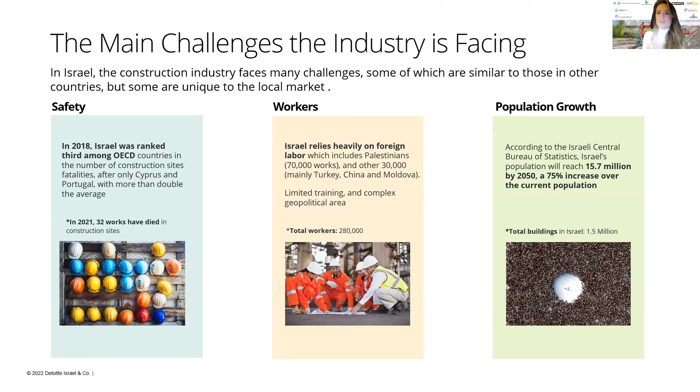But I think one of the most interesting challenges the industry faces in the next couple of years isn't from the industry itself, like workers or safety, but rather a cultural phenomenon in Israel that has a huge effect on the industry: population growth. Israel actually has by far the highest population growth of all developed countries. It grew three times as fast as the average OECD country, and it's way above countries like India or Bangladesh, which is surprising. The fertility rate in Israel is 3.1 per woman. We have children, a lot of them, and it's not only because of different kinds of societies — it's a population-wide phenomenon.

This means we need to build a large number of buildings in Israel, almost doubling what we have today in the next 15 years. So we have to build fast to meet the demand. This would be fine if we were a country like Canada with endless land to build on. But in Israel we have a lack of land — we have 21,000 square kilometers as a country, but more than 60% of it is desert. So we need to build fast, we don't have where to build, and we don't have enough good, trained workers to do so.

So overall, the industry faces huge challenges that will push it towards innovation — they cannot succeed without it. But this is only local, right? These are local challenges in Israel. Some of them are global, but these specifically are local.

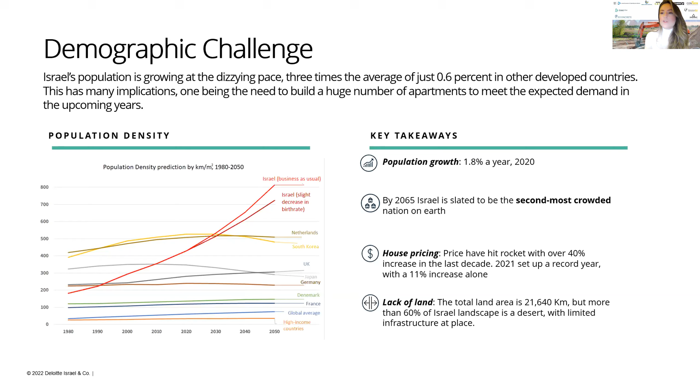What happens when we look at the most global, immediate challenge the whole world is facing — climate change? Israel was established 70 years ago, but we were dealing with survival most of the time, and we still have a lot of challenges. We're an island inside the Middle East, so climate change was not the government's immediate concern. We pushed it aside and didn't do much to address this big challenge. But it's not like we're not feeling the effects of global warming — we're a hot spot here in the Middle East, experiencing almost double the rise in temperature compared to global warming in general.

Israel is feeling it particularly strongly. But over the past 3 years, Israel has taken a few steps toward entering the game to combat this global threat. I'll give you a few examples. The first is Glasgow 2021 — Israel participated and set up very ambitious goals to reduce emissions. The Green Building Council and its standards in Israel were established 16 years ago on a voluntary basis, particularly new compared to other standards in the world like LEED or BREEAM. The Israeli standard was the latest and started completely voluntary, but next month, March 2022, it's going to become mandatory for all new buildings in Israel.

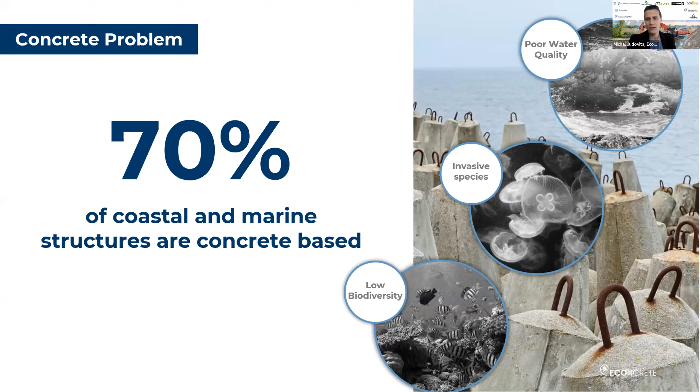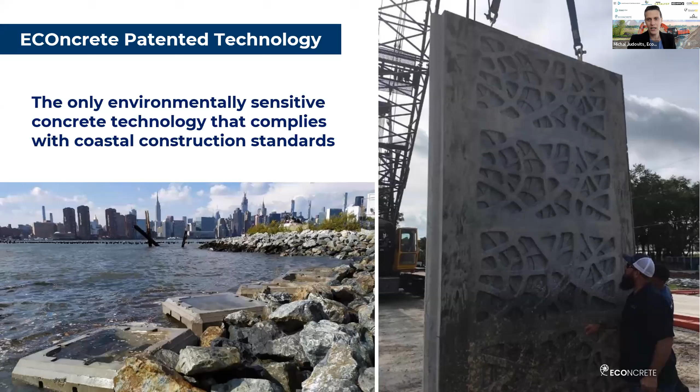Concrete is a rather harsh material in the marine environment, and typically those structures are dominated by invasive species and really burden the ecosystem. Today, we are the only ecological concrete technology which complies with coastal construction standards, allowing us to preserve beautiful and highly protective natural coastline ecosystems like oyster reefs, corals, and mangroves, while not making any compromise on structural functionality, stability, and strength.

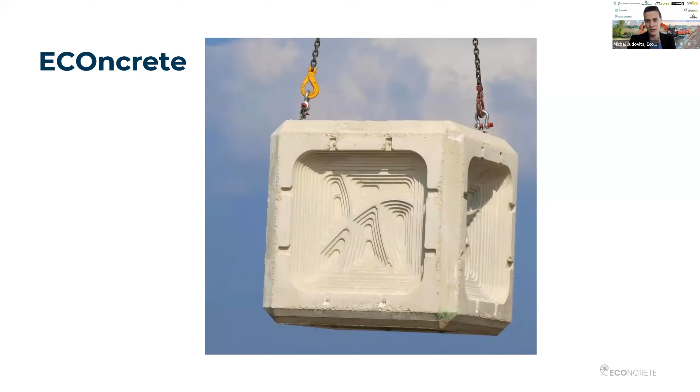In order to preserve the natural lines of defense for the coastline, ECOncrete came up with a biomimic win-win solution to bring concrete to life. The technology is based on three elements that work together in synergy. First, the material composition - we have developed an admix component that represents about 10% of the cementitious materials of the concrete that neutralizes the negative effects of concrete on marine life.

Then we were looking at the surface complexity. What you're seeing on the right is a texture - when you're thinking concrete, you're thinking about something very smooth, very straight. We actually spent a lot of time in the lab trying to mimic that look and feel of natural rock.

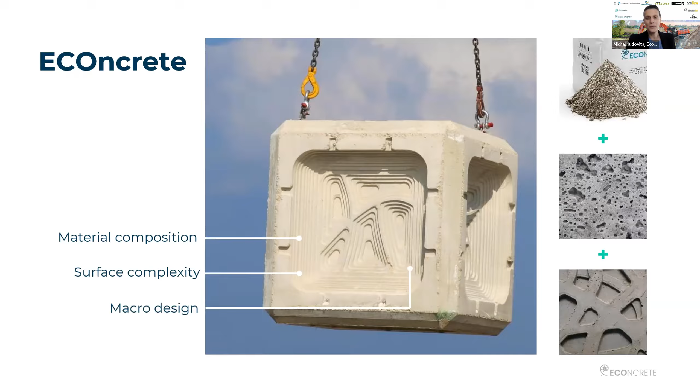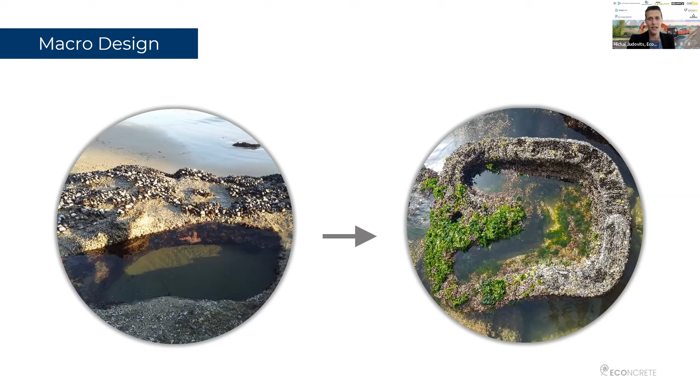And then we're looking at the macro design. In order to come up with the designs, we were looking at nature - the shell of an oyster and the polyps of a coral for our surface texture design, and habitat features like tide pools and mangroves for our three-dimensional designs. All of those three components work together without compromising the strength and operational capacity of the concrete.

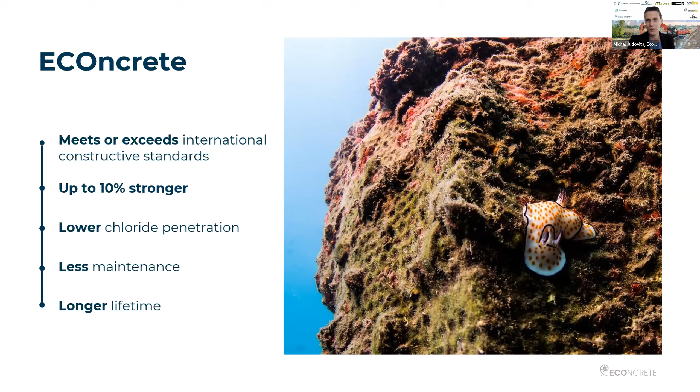The technology provides ecological solutions and advantages, for example increased biodiversity and reduction of dominance of invasive species, and increased aesthetics. But, and not less important, we also realize that the technology is helping to protect the infrastructure, to make it better, longer lasting and stronger in a process called bioprotection, where the skeletons of organisms that grow on the concrete actually make it stronger over time and reduce the sensitivity to erosion and even to chloride penetration, which could translate in the long run to reduction in maintenance costs.

Let's see how it looks. This is a piece of concrete that has been put in the Mediterranean, and this is how it looks after 12 months. You don't see the concrete anymore. What you do see is oyster and tube worms and coralline algae that are thriving on the concrete.

If we're going to talk some numbers, 1 kilometer of our ecological seawall absorbs 2 tons of CO2 per year, which is equivalent to 100 adult trees. But the interesting thing is, this is happening - just to give a very short explanation without getting too much into the biology side.

Because we're working with nature, we are seeing a process of calcifying organisms that creates an active carbon sink. This happens throughout the lifespan of the project. So every year it's like planting a forest, and it's not something that happens only once. In 60 or 120 years, the system will keep on turning CO2 into calcium carbonate skeletons in a very healthy process.

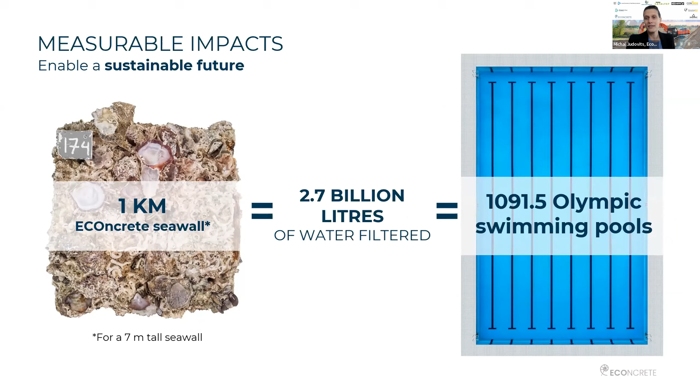What it also does is filter the water. So, same thing, 1 kilometer of a seawall is equivalent to almost 1,100 Olympic swimming pools in terms of the capacity of water volume filtered. And this is happening every year throughout the lifespan of the project.

Let's see a bit of how it looks. We're adjusting - this is a technology. It's important for me to say we are not a construction company. We're a technology that can work with different products, different shapes, and different applications.

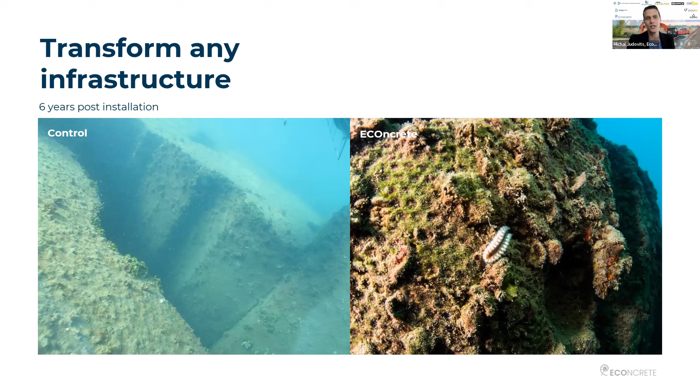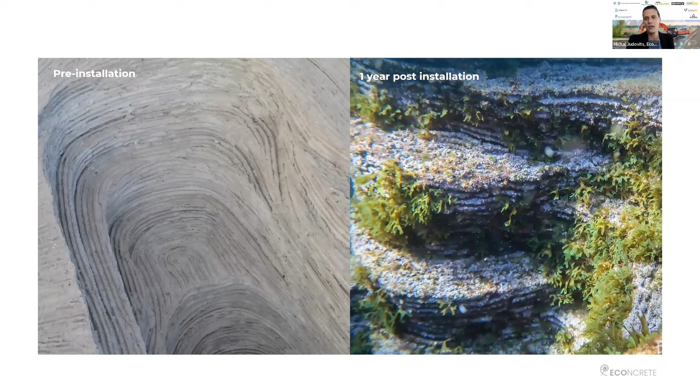What we're seeing here are tide pools - pre-installation and 1 year after installation. You do not see the concrete anymore. We're working in different ways for different solutions.

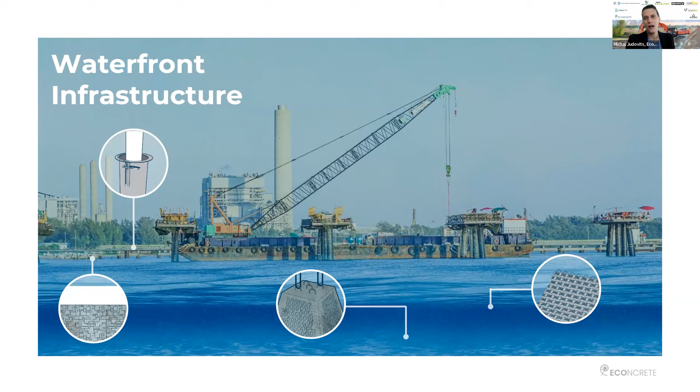If I really try to simplify that, we have shoreline protection, we have waterfront infrastructure - so everything that is touching the water: ports, marinas, bridges, tunnels, piles - and then we have the offshore application, as I was saying, marine mattresses, mooring units, and also scour protections.

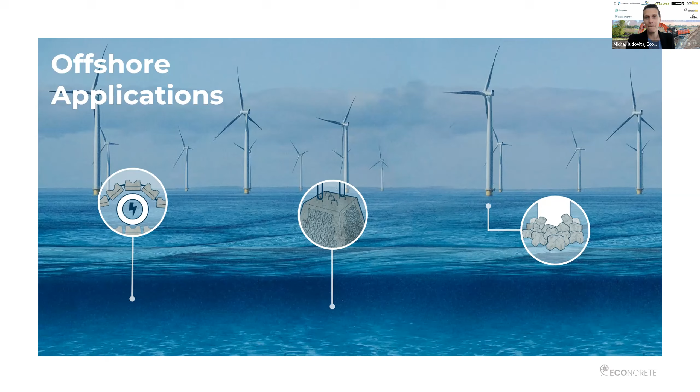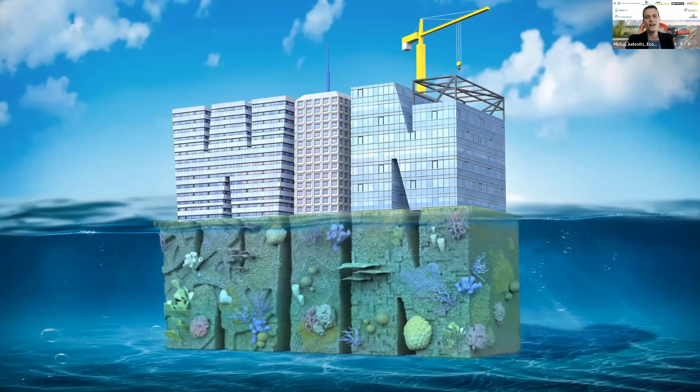Finally, I want to talk about impact. So the goal here is to change the industry and to have nature inclusive infrastructure across the globe, bringing higher biodiversity, better water quality, and active carbon sink, but also to help projects with permitting, with mitigation, and to allow the project to be robust, longer lasting, and even low maintenance. This is what we call our win-win solution.

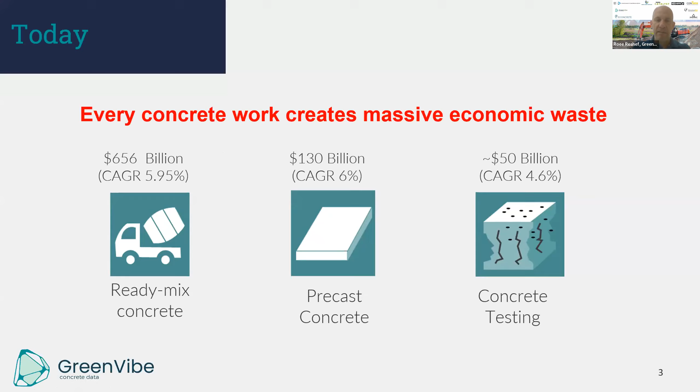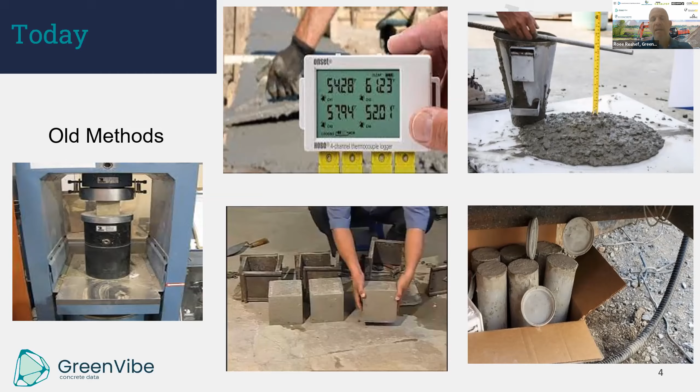The core reason for that is that the industry is still using very old methods that are not up to date. They're not delivering the right data that is required, and there is a big gap.

Eventually, as of today, concrete is kind of an art. In Michal's presentation we said it to the extreme, but concrete is an art in the negative way, I would say, and GreenVibe is actually making it science in order to do the industry optimization. This is something important to keep in mind.

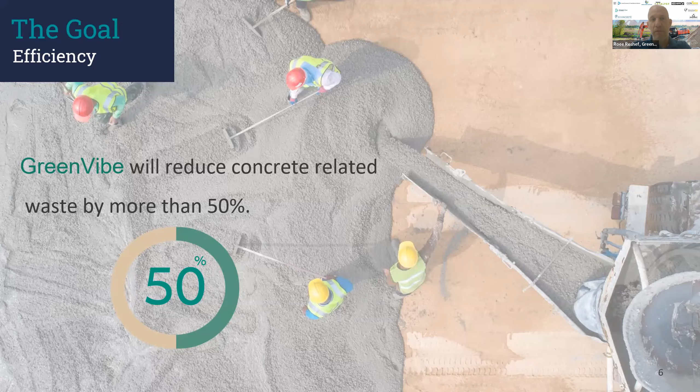There is a massive waste, and we're aiming to reduce more than 50% of the related waste. That doesn't mean the cost will be reduced by 50%, but the overall waste is going to be reduced. If we're talking about time, we're going to cut time waste on site and in other segments by 95%. All kinds of failures faced on site are going to be cut by 50%, and the cost related to them by 75%, simply because we're going to capture it much before it's usually captured.

Cement redundancy is a real problem in the industry. Today, the over-design, the safety margin of cement, is between 14 to 50%, depending on the specific concrete, and this can be cut by at least 50%. We're aware it's not going to be zero safety margin, but it can go down to 7 up to 20%. There is no need to keep such high levels of safety margins.

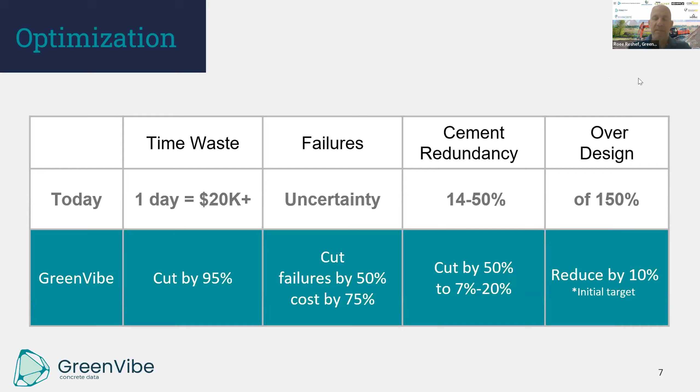Looking at the industry overall, it's well-known that the industry is over-designed by definition, and we're aiming in the long term to reduce the over-design. Just for the sake of discussion, over-design means that if a building is based on concrete and it's 50 floors, usually the infrastructure can hold up to 75 or 80 floors. It simply doesn't make any sense. The main cause is that from the planner to the concrete suppliers to the GCs, the general contractors, they have no data, so each one of them is adding more and more safety margins.

So eventually what we're delivering in a very accurate way is the strength of the concrete in real time, temperature, humidity, and a set of other parameters that are helping all the different segments and angles of the industry to improve themselves on site and from the supplier side, meaning the concrete suppliers.

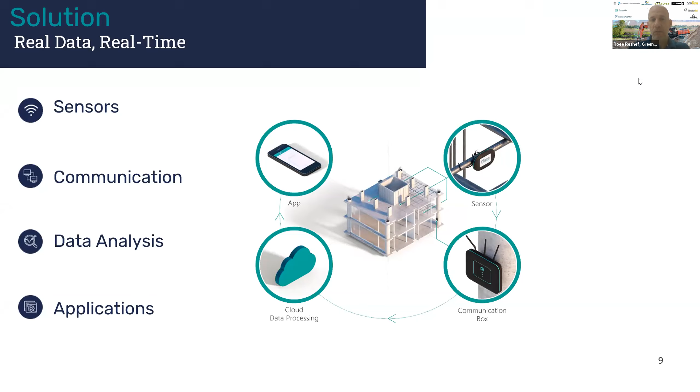This is a scheme of how the system looks like. We have the sensors, we have the hub that communicates to the cloud, and then we're calculating all the algorithms and delivering in real time very accurate data about what's happening inside the concrete.

I don't want to dive into the technology too much, and I can relate it to some of what Maya said at the beginning, because at least one of the technologies is coming from some kind of defense application being used in Israel. But eventually, we're doing a synergy of very deep technologies, and the outcome is a very accurate, deep analysis of what's happening in the concrete that you can really trust and operate according to the data.

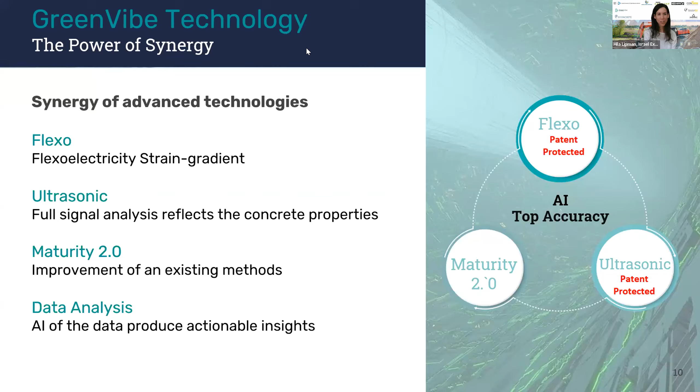Michal, can you tell us what exactly kind of projects you are looking for in Germany, and maybe if you have some activities already in the German market, we'll be happy to hear about that.

Thank you for that. As I said, 5 minutes is a very short time to introduce what we're doing. We have 3 types of applications: one is shoreline protection, the second is waterfront infrastructure, and the third is the offshore industry, meaning there are different opportunities in each of them for projects. If there is any project of construction, our vision is for every concrete in the water to be ecological. So any concrete for water construction, marine construction, is something we are going to be interested in.

On the other side, there are the partnerships. We're doing different collaborations and OEMs with companies that already have - I mentioned we are not a construction company, we are a technology provider, and therefore we know how to adapt our technology to different solutions. If there are companies providing different concrete-based solutions for marine and coastal construction, then we're interested in talking to you.

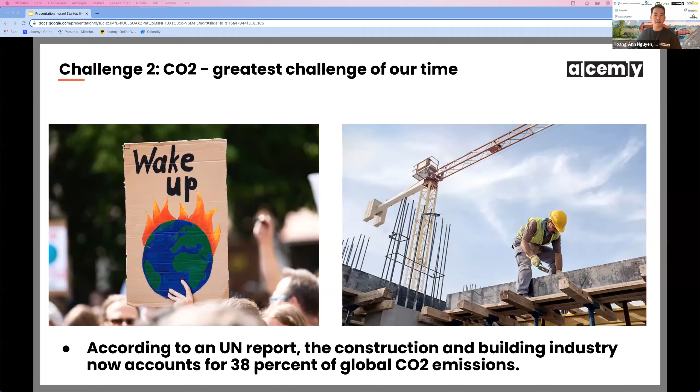To give you a short glimpse, cement and concrete are responsible for 8% of worldwide emissions, around 2.8 gigatons of CO2. To make it more visible, I often mention: if this industry were a country, it would be the third largest emitter, only after China and the US. And in the future this will not change, because this material will still be needed.

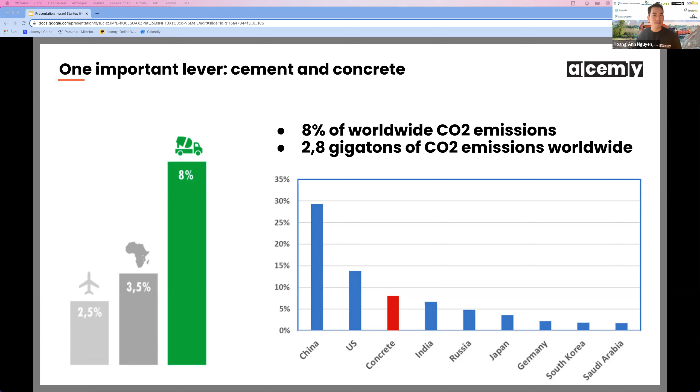So we have to work with this material. Concrete is the most widely used man-made material in existence. In the last centuries we've poured it into buildings, roads, bridges, skyscrapers. Every year we pour 4.6 billion tons of cement. Every month we build the city of New York newly. The secret of concrete's success, in the end, is its low price and wide availability.

But first, let's take a closer look at what concrete and cement actually are. Roee from Greenvibe already mentioned this, but it's interesting because in the beginning of this job it was difficult for me to differentiate cement and concrete. Cement is a gray powder, produced by burning the natural resource limestone in a kiln at around 1,400 degrees, and mixing it with supplementary cementitious materials such as slag, fly ash, and others. This cement is the most important part of concrete because it gives the material its strength, working like a glue. If you mix the cement with aggregates, sand, water, and SCMs, you get concrete, this wonderful liquid material.

One important aspect to mention is that 90% of concrete's CO2 is polluted in the cement-making process itself, and it's only possible to partially decarbonize this process. That's why, for example, Bill Gates stated in his book that this industry is one of the most difficult to decarbonize. But in the end it's clear we need the material, and we urgently need more innovation in this particular industry.

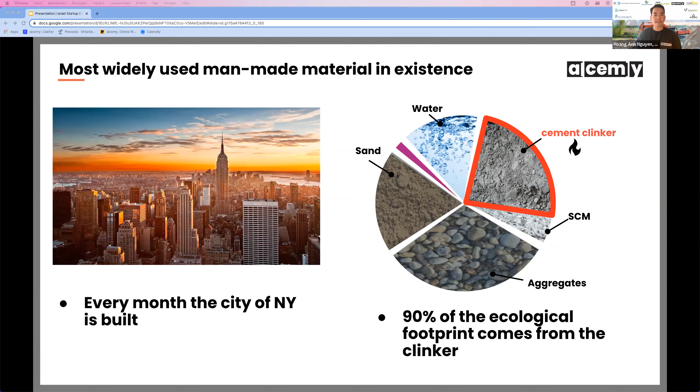And that's exactly why Alcemy exists. We are a Berlin-based green tech startup founded in 2018 by Leo, whose family owns cement and concrete plants in Germany, and Robert, who built the machine learning team at Flixbus. With the combination of machine learning expertise and concrete and cement knowledge, we want to accelerate the decarbonization of this industry. Our goal is ambitious, but we think it's achievable: we want to reduce cement's CO2 by 1 gigaton.

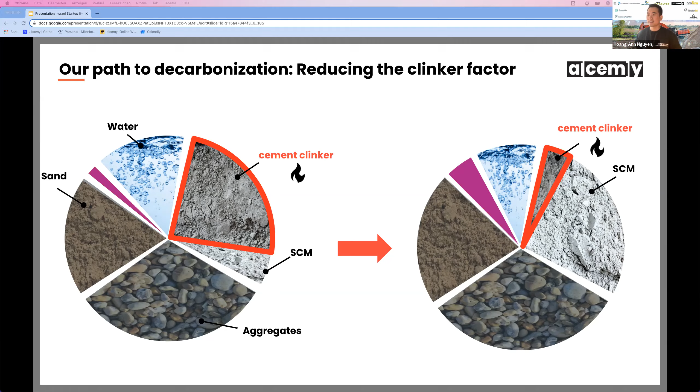So you might ask, if that's so easy, why isn't everybody doing that? Why are producers still using concrete with such a high amount of cement clinker? The answer is more difficult than easy. One main reason is that the less clinker you use, which is the glue in the concrete, the higher the effort needed to produce cement and concrete.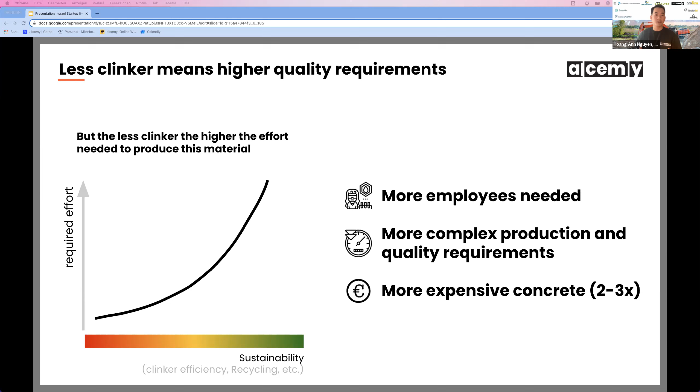So substituting clinker means the concrete will be more sensitive and harder to produce. With manual production today, it won't be possible to produce low carbon concrete. The consequence is we need more employees to monitor this process, leading to more expensive concrete, approximately 2 to 3 times the price of concrete today, with much higher quality requirements. In the end, this makes it unattractive for the real estate industry because they are so cost-driven.

And we want to change that with Alcemy. Our integrated production control enables automation and steady quality in an increasingly demanding environment. By this, we reduce the additional cost associated with producing low carbon products, making them more attractive for the entire market. So let's have a closer look.

We have a data-driven automation technology which runs in cement and concrete plants 24/7, from the kiln, which you can see on the left side, to the mixing truck on the road to the construction site. Based on existing data quality, we train a machine learning model that predicts quality parameters such as fineness or strength during production. To ensure steady quality, we deliver an optimized fineness parameter to the control station and directly to the expert systems. We think that with these tools we can enable the staff to produce better, more cost efficiently, and at scale.

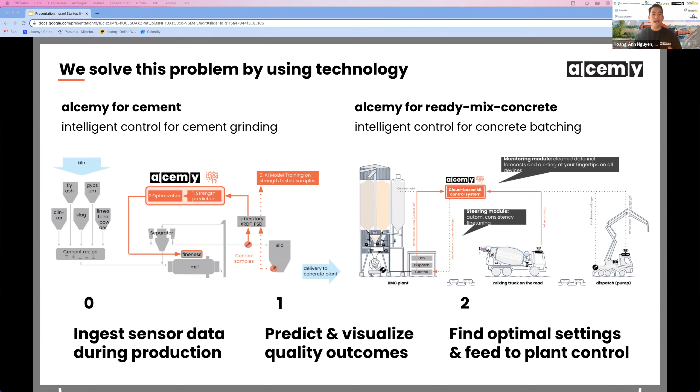Our added value is quite obvious: we can improve quality by up to 40%, and employees can gain unique insights into their production. On average, our customers can save up to 400,000 euros by reducing the clinker factor and grinding energy, and they can transform their portfolio to more low carbon concrete. In the end, we deeply believe this is the most affordable and easiest way to decarbonize this industry and set a new standard for low carbon concrete.

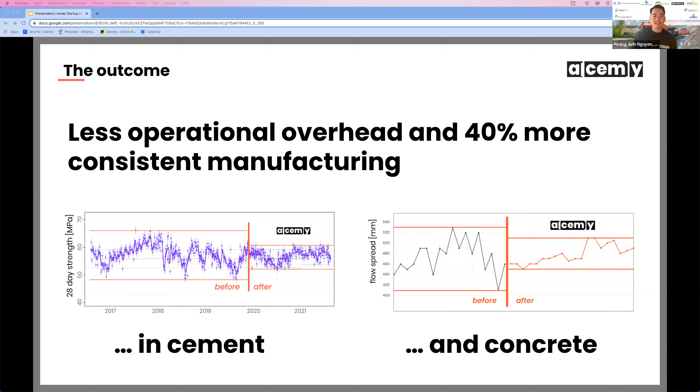So in the end, let's decarbonize this industry together, not just in the future, but already today. Thank you, this was a short overview. I'm sure I wasn't able to talk about the political dimension, but let's talk about it in the discussion.

Thank you very much, Hoang. Fascinating technology. Tell us about the challenges you're facing in Germany with regards to regulation. Roee also mentioned it already: there are very high safety margins required or simply implemented just because of a lack of knowledge. How do you deal with that? Because I know you put great efforts as a startup in this direction as well, not only in the technology, but also in making sure there's a political and regulatory environment to make the implementation actually happen.

Yeah, like most of you know, Germany is known for its bureaucracy and sometimes slowness in innovation, and this is actually what we are facing in the cement and concrete industry. For example, if you want to use a concrete with a low clinker factor, you often need a special permit because the cement and concrete norms are limiting our options at the moment, and that's also limiting the innovation potential.

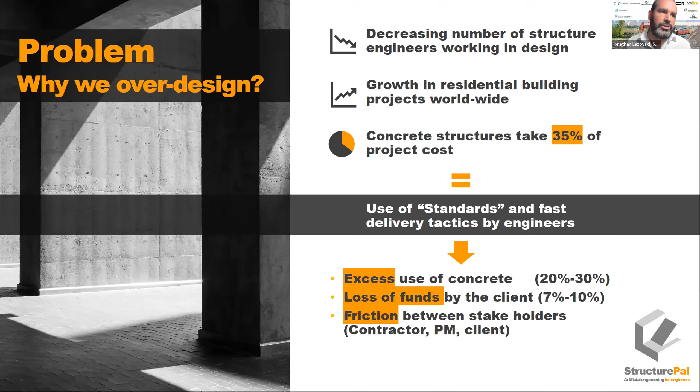So what are we offering here? Well, we're offering in two aspects.

First is the efficiency of the design, and second is the quality of the output of that design. So what our users will get with our software is, first of all, 50% design automation. That means from the overall work, the preliminary design that takes 50% of their work will be automated. Second, we will never replace their software.

We will integrate into their software. I have to say that from the 10 years I've been in this world called construction tech, I have never seen a good replacement of software. Just look at how much it takes to implement BIM and replace 2D drawings, and that's only one example. So our choice was to integrate into their own software, creating basically no learning curve.

After that, structural engineers will be able to output a design that has 15% less reinforced concrete and a cost reduction of that concrete. Reducing concrete by itself is not the only thing that reduces the cost, but actually taking into consideration the construction methods and regulations.

But the most interesting thing here is that by reaching those numbers, we can actually reach almost 30% of CO2 reductions just by using our software, comparing of course to a regular design done just by a human.

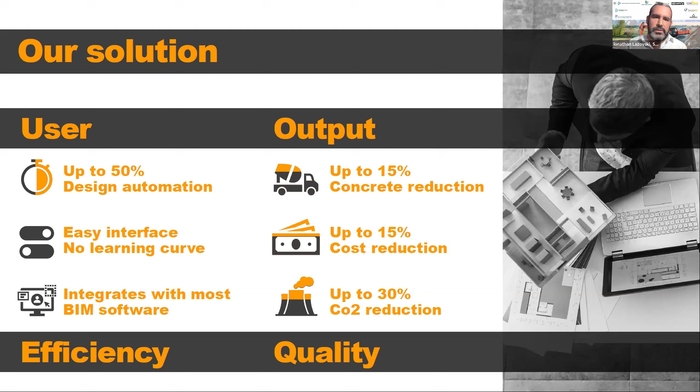So how it works, as we mentioned, integration, not replacing. We integrate into the BIM software used by the structural engineer, into the finite element software used by the structural engineers. Our software basically works in the background.

The structural engineer will get the design from the architect and start working, but in that moment he will stop. Instead of drafting, instead of wasting 4 weeks of work on drafting and searching for a structural design solution, he'll change his position to specifying the challenge, not drafting the solution.

In other words, the structural engineer will specify within our platform the architectural limitations, structural loads, costs of material, types of material, different construction codes and methods, and if there are CO2 regulations or credits that can apply, even that. Just with a click of a button, our AI will take all of that data and start automatically generating designs over and over.

But the engineer won't see that happen; it's going to occur in the background, and the AI will evaluate every design it automatically generates in two terms. First, is it structurally sane, meaning does it work with the code, the regulations, and the loads? And at the same time, what is the cost of that, in cash, in credits, and in volume?

Eventually, after between 16 and 300 iterations, which takes roughly 30 minutes for the AI, it will converge to the best solution. What's very interesting is it won't just suggest what the engineer should do, it will actually output a detailed BIM model, a detailed FEM model, and a full report depicting all the elements, the price, and how much CO2 was reduced.

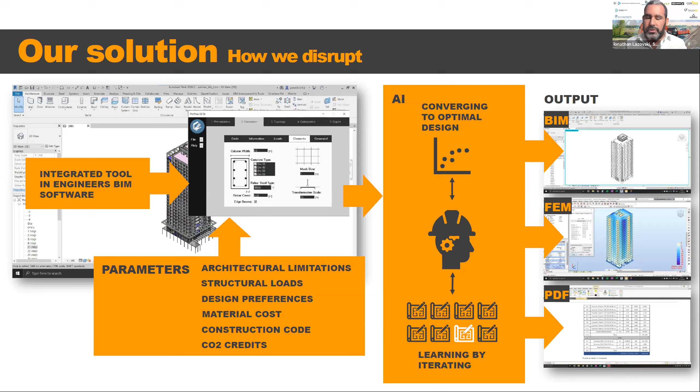In terms of business model, we're keeping it pretty easy, just asking our client to pay by the square meter. At the moment, $1, that's it, and they can optimize their solution.

We're working with top-tier construction groups and structural engineers. We're tackling a market that is 850 million square meters big, and we're venturing into high-rises and skyscrapers as well.

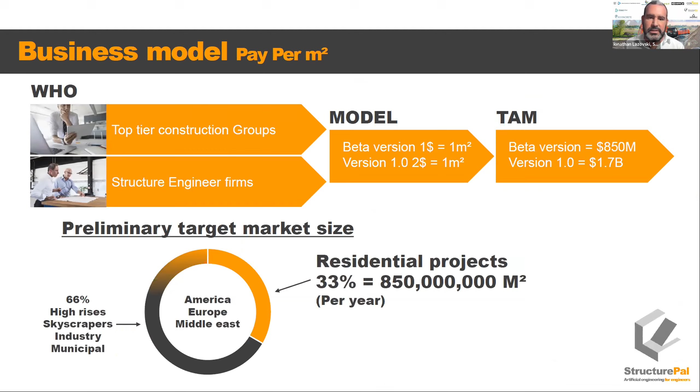In terms of accomplishments, as mentioned, we are alumni of ConTech and Inventec, one of the leading accelerators in the north of Israel, where we are based. We've been awarded one of the top 50 ConTech startups of 2020. And since we have one leg in construction tech and one in climate tech, we were just awarded first prize at the Renewable Energy Conference in Israel, which happens once a year, defeating 9 other startups from climate tech industries.

In terms of traction, we're working with the 3 biggest construction groups, first tier in Israel: Shikun u Binui, Shapir, and Ashdar from the Ashtrom Group. And now we're venturing into the British market and the Emirates market, and we'd love to take our first steps into the German market as well.

And the most interesting thing about it is that the leading team is composed of, yes, structural engineers, all of us, but with one small change.

Not only structural engineers, but actually programmers and AI enthusiasts. That means we have one leg in the industry and another leg in the technology. And we're actually the client creating his own solution.

Our investors, again, are the 2 biggest construction companies in Israel and some financial investors as well so far. Proud of having in the advisory board Professor Fazak, one of the leading names in structural engineering and digitalization, and Mr. Eli Rodman, who is the local CEO of Autodesk in Israel, and Avi Hakim, an engineer with 40 years of experience, actually taking the role of being the worst client we can ever have.

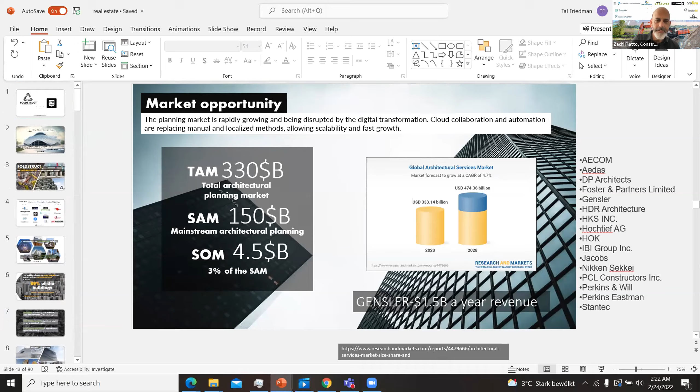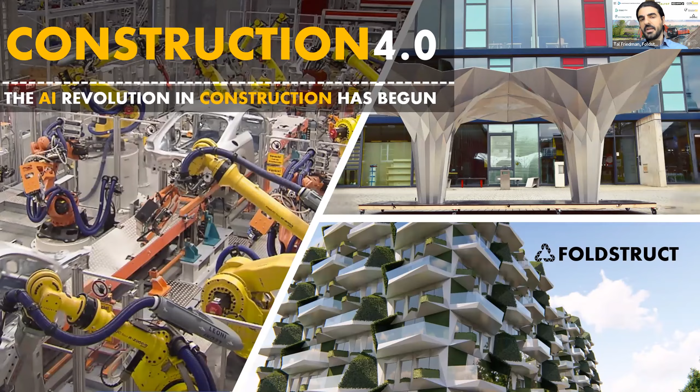So yeah, thank you very much for hosting me. A lot of familiar faces here. It's a great honor to be here, and I've also been living in Germany the last couple of years, so very exciting times seeing how this develops, and I'll get straight to it. So as Zahi mentioned, I'm the CEO of Foldstruct, and we're talking about the construction 4.0 age, moving from manual construction to AI and robotics.

Now, if we look at the industry as a whole, a bird's eye perspective, we're going to see millions of buildings that will be built and renovated over the next 10 years, where construction is responsible for 40% of global CO2 emissions. This means that sustainability equals scalability. We can't talk about a sustainable kindergarten, a sustainable city, right? Or even a sustainable country. We've got to talk about how to transform the whole industry in order to make an impact. And it should be said that construction on its own has the ability to solve the global crisis, as we're talking about 40% of the global CO2 emissions.

So all of these can be solved with digital industrialization, just like we've seen in other fields. The Industry 4.0 age is allowing us to save time, cost, and CO2 by standardizing and automating construction, working in controlled environments, and that is by all means the key to solving the problem.

So if we look at the automotive world, we can see that from 1921 to 2021 - which is already 22, well - cars have become 10 times cheaper, faster, and greener. The other way of looking at it is to say that buildings have become 10 times more expensive, as everything is relative. So that's one way of looking at it.

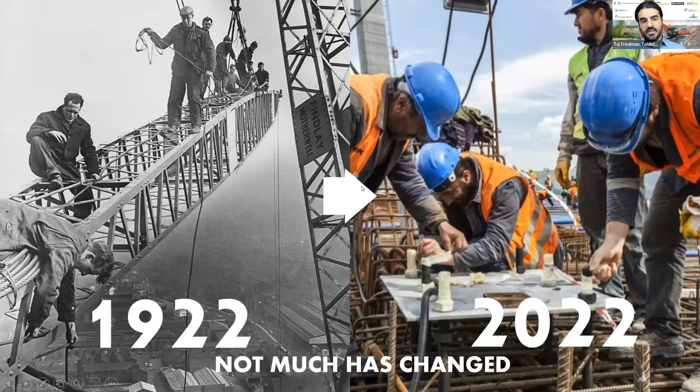And if we compare that to the automotive world, we can see that the labor has gradually changed into something completely different than the beginning days. In construction, however, not much has changed. We still have manual labor. The labor costs are rising, less and less skilled labor. And the key, of course, is to look at how we plan buildings.

So the definition of insanity is to do the same thing over and over again and expect different results, said supposedly Einstein. And yet, when we design the same buildings, we're bound to get the same results. And this is, of course, in line with what Jonathan was showing before. So 99% of the buildings that we build are still manual. They are too polluting, and worst of all, they're repetitive. So we're creating more and more of them, talking about building faster and doing more of the same.

But it's all a question of how we actually create buildings that reach the goals that we described. And again, it all starts from planning. So how do we plan today? We see that in thousands of years, planning methods have not essentially changed. We're still talking about pure geometry, basically.

So it's digital, yes, it's 3D, yes, but by the time we're finished designing a building, we only have a geometrical output in line with statutory regulations, but nothing to do with manufacturing cost and CO2. This is only accounted for in the last 20%, which means we can't change anything, which means it's unfeasible to talk about industrialized manufacturing if you hadn't designed for it in the first place. So the end of an action starts with a thought.

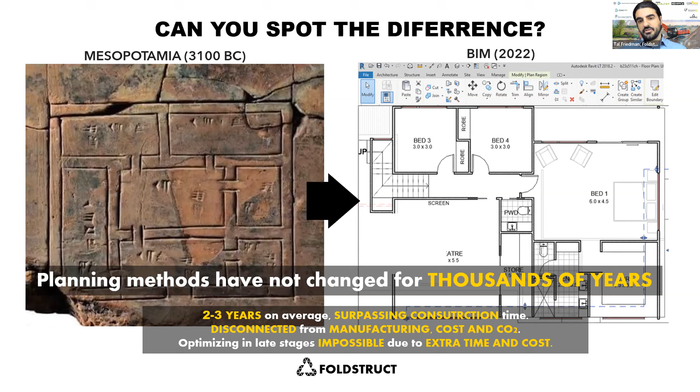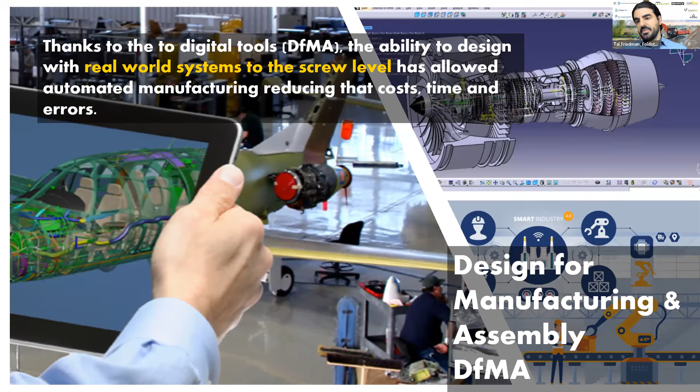If we plan for industrialized construction, we could actually do it. Design for manufacturing and assembly is the key. This has been done in the automotive world, in aerospace, in furniture. It means we're designing at the screw level, with everything including the manufacturing process embedded within the design. As they like to say in architecture, form follows function. We have the functions embedded, and therefore we can create smarter designs.

The way Foldstruct works is by allowing planners to not know everything about manufacturing or sustainability, because they'll never be able to know all that. That's knowledge of tens of different consultants per project, and we can't change people. We can only create tools that bridge the gap between the knowledge and skill sets they have and the goals they want to reach.

So what Foldstruct allows you to do is work on very minimal drawings where you can just focus on planning, and then an AI scanning process converts that model into one that's built for manufacturing. It takes into account cost and time, and of course sustainability, because when we talk about smart materials, we have to ask how we embed them in planning stages in order to see their benefit.

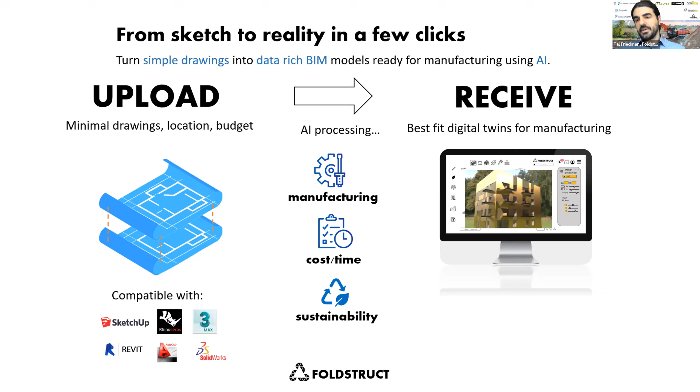I can tell you from experience selling materials to the market, if you're not able to show the benefit in planning stages, you're never going to be able to sell a product. This applies to smart concretes, smart facades — all of those have to show their direct value, and this is what helps make the right decisions.

So what we do is create a platform that bridges architecture, engineering, and real estate, where the output is a BIM real-world system model, as opposed to standard geometry — a bill of materials derived from that, and essentially a financial analysis, ROI, which is the driving factor of all of this. If we don't see an ROI, there's no way we can talk about sustainability. Part of sustainability is being able to provide a good ROI, and that's where scalability comes in.

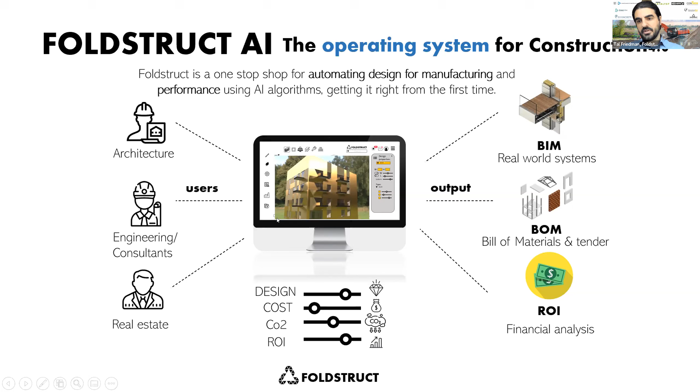We can merge with all different types of platforms, which is one of the biggest problems in the industry. We have an agnostic platform that can communicate with different formats, either as input or output. We don't want or need to replace all other software, but gradually we can reduce dependency on other platforms and closed formats.

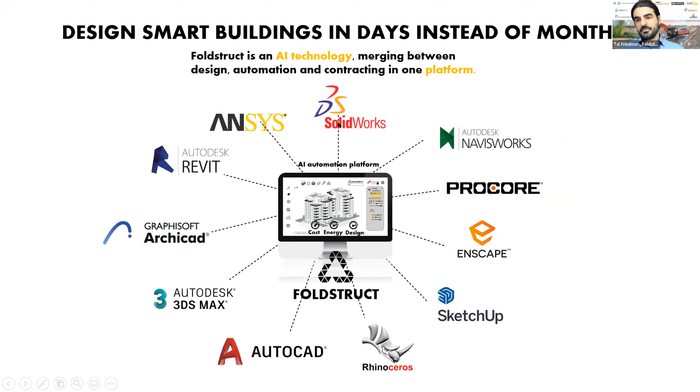Just to give an example of what this looks like: we start with something like this, and in a couple of clicks we arrive at a finished model which already has designs in it. These are adaptable and can give us different suggestions and variations, where we can swipe to the side and choose the best one for us.

Our vision is to bridge between design and sourcing, where on one hand sits the designer, and on the other hand sit the actual suppliers of materials, systems, and contractors. They're the ones accountable for what the designers are designing, and that's the missing link we have today.

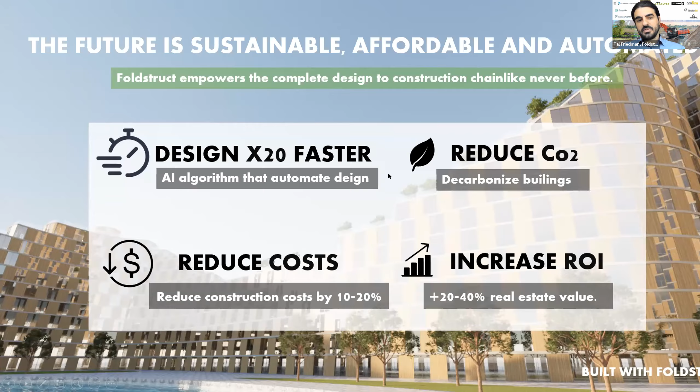So to talk about the advantages, since my time is running out: we can design 20 times faster, and I'd be happy to show a demo to anybody who wants to see it. We reduce CO2 levels, reduce cost, increase ROI, and eventually bridge the gap between design and manufacturing. So that was my presentation.

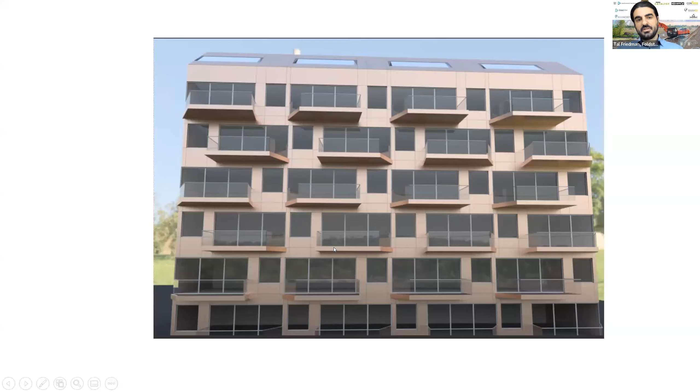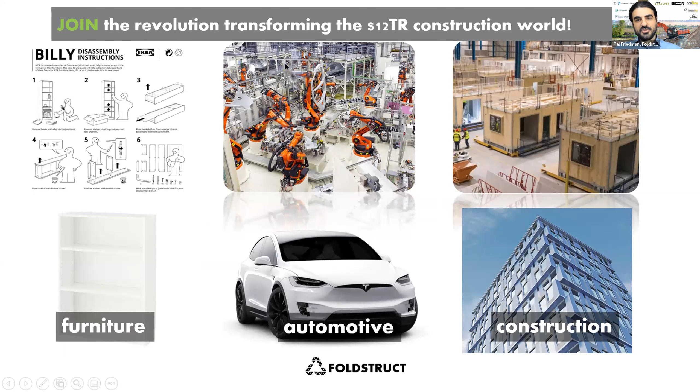Here you can see examples of the things we can design in no time with the software, as opposed to standard methods. This shows the ability to break the box when you have embedded design for manufacturing. So I welcome you all to join the revolution, and thank you very much for your time.